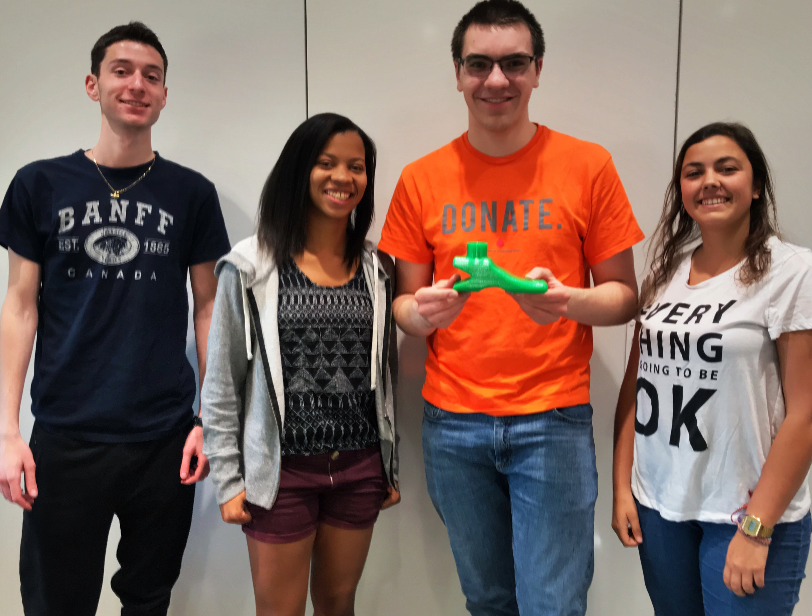Our goal for this semester was to design a 3D printable prosthetic foot that met certain criteria. After drawing some sketches, we came up with this initial prototype. We set the square infill to 50%. Our preliminary print orientation was the foot flat on the print bed.

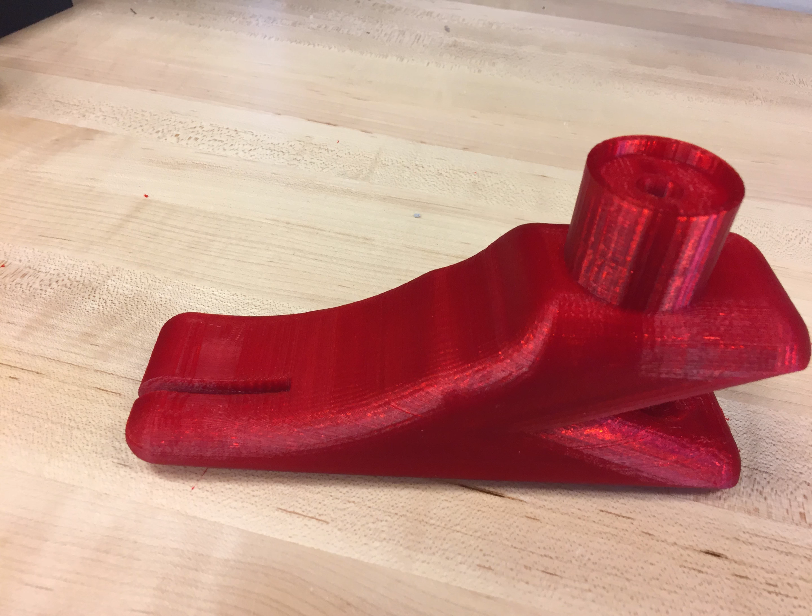We designed our foot in a way so when it touches the floor during the stance phase, it would have shock absorption in the heel rocker. However, due to the material used to create the foot, a controlled design of the foot couldn't be achieved.

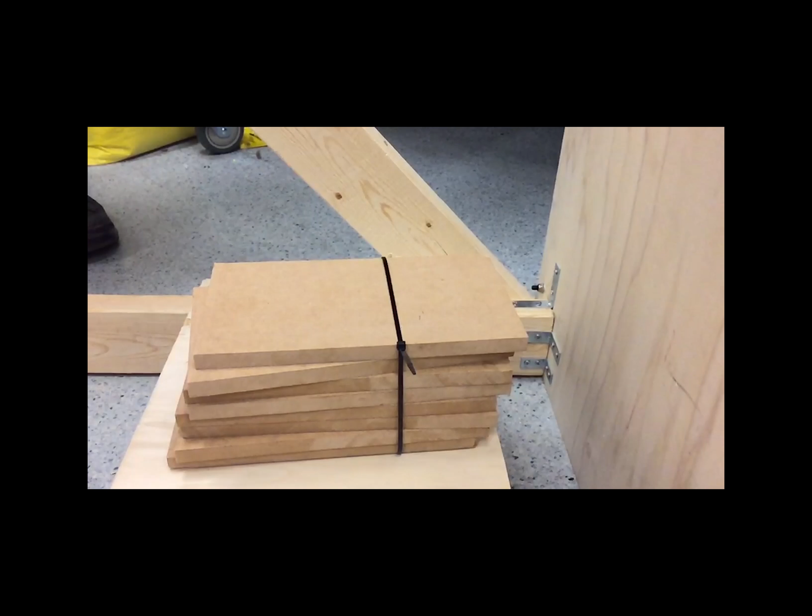During the test, our foot was successful in achieving the shock absorption aspect as it bent a bit after the shock. The fracture that compromised the integrity of our product was a clean shear across the two fillets. This caused the prosthetic to completely separate into two solid pieces.

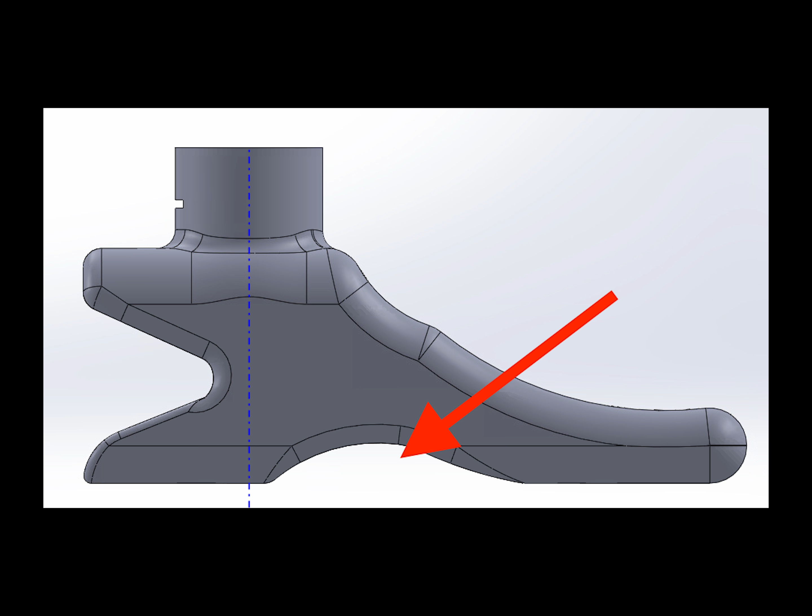Several refinements were made going forward. In our second print, the square infill was lowered to 30%. We changed the orientation to print on its side and added an extruded cut in the bottom of the prosthetic as a means of lowering the weight and minimally increasing energy return. This foot collapsed quickly under impact as a result of shearing in several locations.

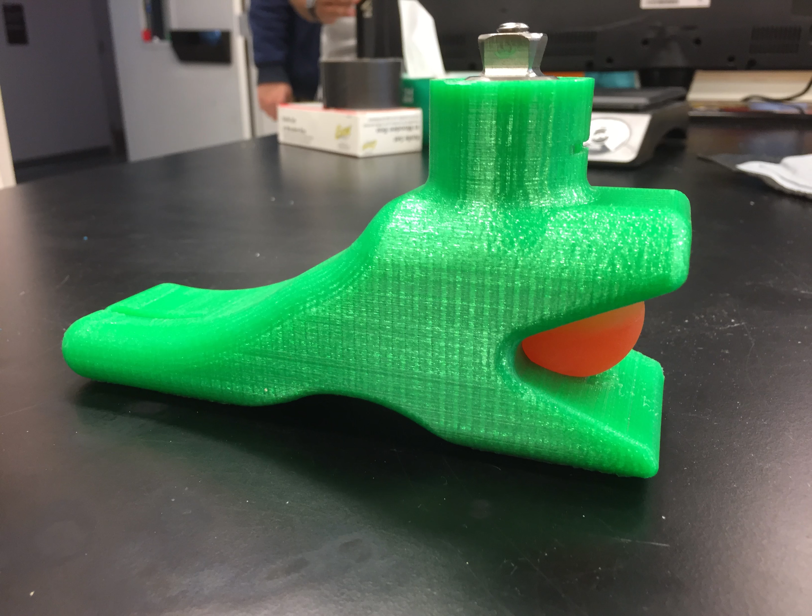In our third and final print, we decided to change the infill pattern to hexagonal. The idea here being that this would make for more effective use of space, strength, and weight. It was our understanding from the previous two tests that we needed to revert back to the original print orientation for strong bonds to be produced in the correct locations, that being orthogonal to the build plate.

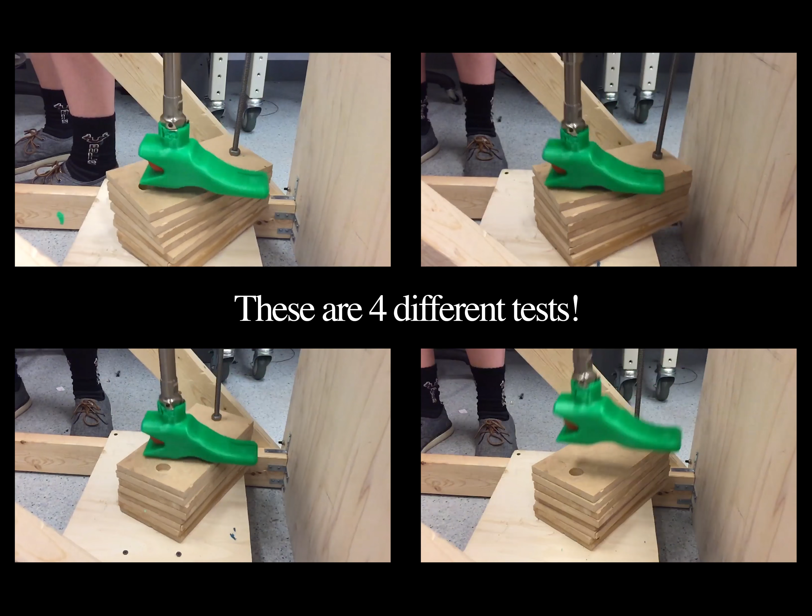As seen from the video, this design produced a more structurally sound prosthetic capable of dissipating the load without easily fracturing. After testing the third prototype several times without it incurring any meaningful damage, we attempted a fully destructive smash test to observe how it would fail under catastrophic conditions.

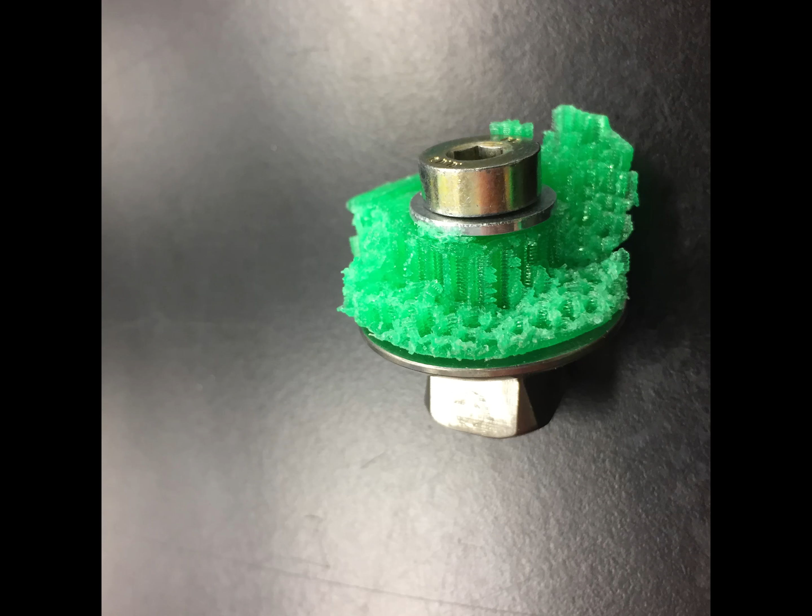With regards to what we can do going forward, it's important to note that we had a limited number of resources. In an optimal and ideal environment, we would test 10 or so differently designed prosthetics under consistent force.

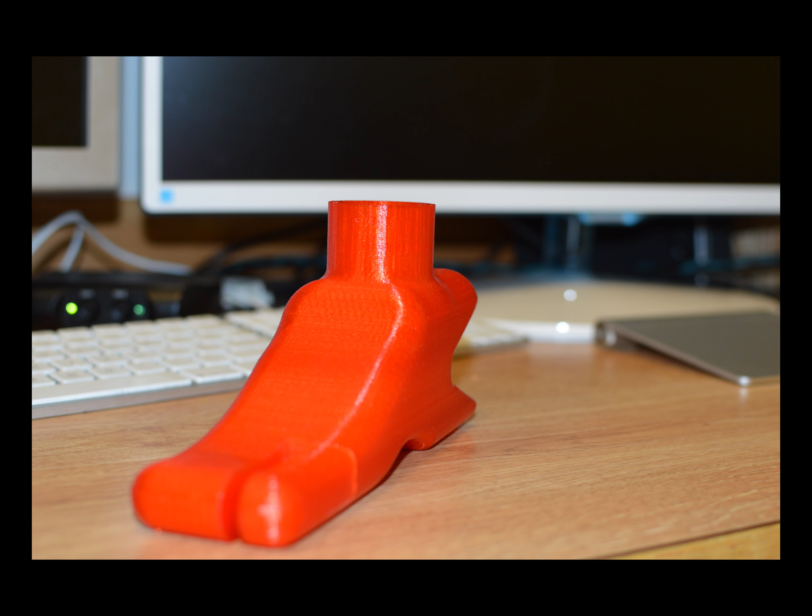Dimensions to account for the ball, fillets, rounds, and the extruded cut at the bottom were all fairly arbitrary. A good idea would be to vary each of these dimensions at maximum and minimum values within a reasonable range, operating under the 2^k factorial design of experiments, and see which would perform the best under a given load.

The entire prosthetic was built using only one material, excluding the bouncy ball. In future iterations, it would be a good idea to consider a high-strength, flexible filament such as NinjaFlex.